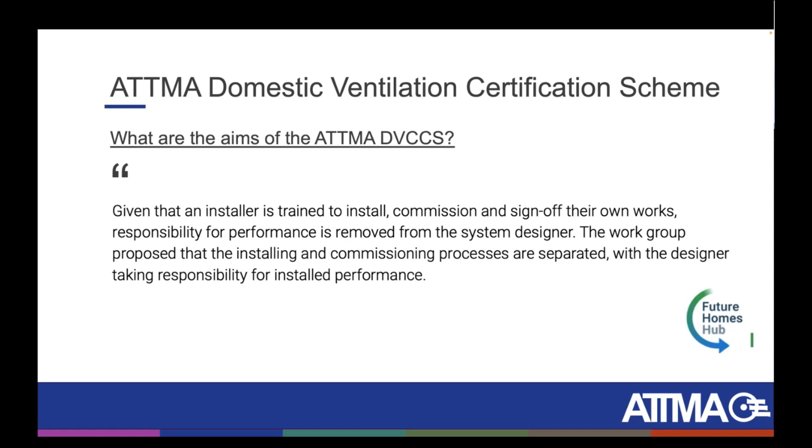The next line I took is, given that an installer is trained to install, commission and sign off their own works, responsibility for that performance is removed from the system designer. The work group proposed that installing and commissioning processes are separated, with the designer taking responsibility for the installed performance. Again, strong words, and we agree. It's time to make an improvement.

The last slide, figure 96 of that report, I thought was very powerful and definitely one to share with you - they split the process into 4 separate sections. Our chair said to me this morning, well, you could actually have a 5th. I thought, currently we have 1, so let's not run before we can walk. We have section A, which is design. We have B, which is install, and C, which is commission. Commissioning is actually where we sit right now.

This certification scheme that we're launching is about the commissioning. We're not the installers, we're not training for installation. We are simply looking only at the commissioning side of it, making sure that what works does work. I know there will be questions about overheating and approved document O, and it is our plan to work our way back - we're going to start at commissioning, then do installation, and we'll do design and overheating assessments as part of that. Overheating and approved document O does come into the commissioning process, but not quite in the way it really focuses heavily on design and making sure your window's open and you have the correct purge ventilation. So we're not going to focus on that just yet.

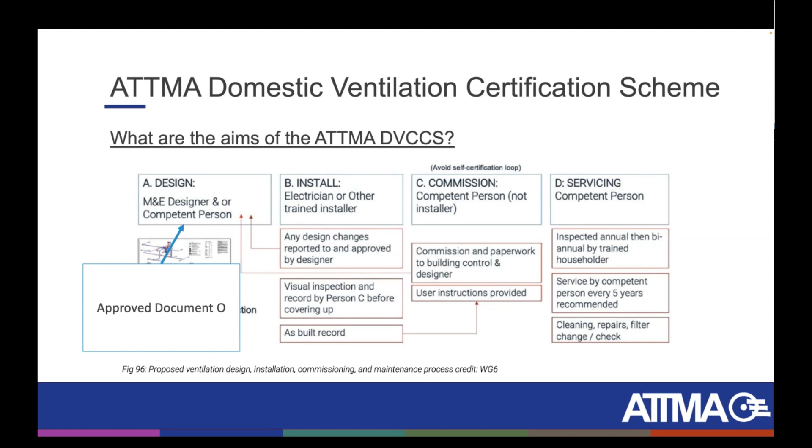Given that we do have a sound insulation testing scheme and we also have a ventilation scheme, at some point it would be prudent to combine the two and measure noise from ventilation. So do watch this space - this has the ability to really open ourselves up.

So the aims of the ATTMA DVCCS - again, catchier names can go into the comments - is to provide scheme members and testers with an independent and impartial way of demonstrating professional competence, as well as meeting the government's regulatory compliance requirements.

Testing, we know, has been mandatory in England since 2010 I believe - 13 years we've had of ventilation being measured. We all know, if you speak to anybody that does it, the fail rate is incredibly high, but the reaction, change and retrofit rate is incredibly low. These certificates get swallowed up and disappear, and we're going to make sure that no longer happens.

It's about giving valuable recognition under the scheme's brand to use for their benefit in the market, plus technical and non-technical support from our impartial staff employed by the scheme to manage what we do. It's really important - one of the successes of ATTMA has been our independence. We are truly the independent side of the business, and we really look after our members. None of us go out and do testing, none of us go out and do measurement, none of us go out and compete with anybody. We exist to make sure the industry operates to its full potential.

The ongoing promotion and marketing of the testing, specifically with its members, specifiers, stakeholders and regulators. We're probably on a lot more committees in some very important places than we always talk about, and that's something we definitely need to improve on. But we're always working behind the scenes with local governments, always reviewing reports and documents that come in to make sure air tightness, acoustics, and now ventilation is always top of the agenda.

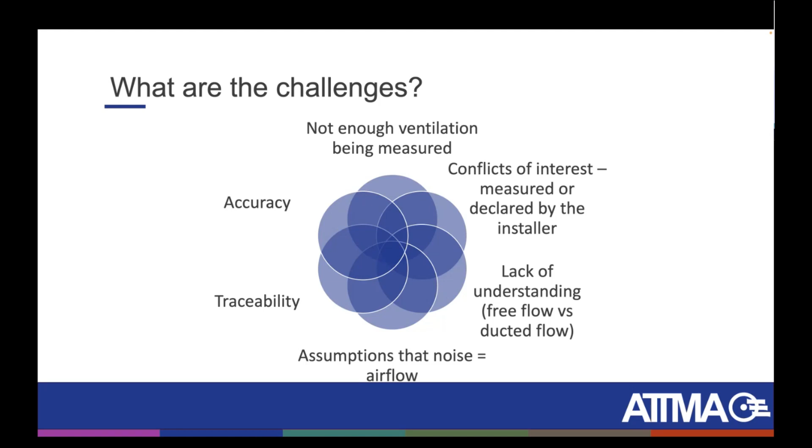We have a traceability and an accuracy issue. So not enough ventilation being measured - we know change cannot happen without a fit for purpose certification scheme being in place. And that's what I am hanging my hat on, that this is a fit for purpose certification scheme to make sure that we are properly measuring ventilation that's being installed.

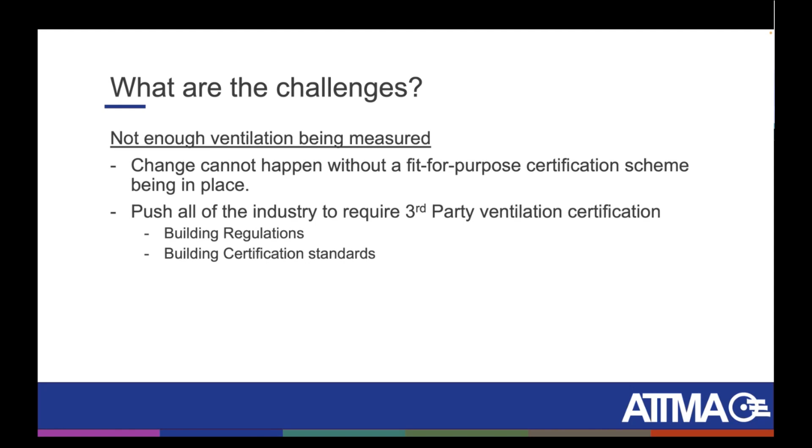We're going to push all of the industry to require third-party ventilation certifications. By proving the system we have and showing how it can be done, we're expecting to be dropped into building regulations and certain building certification standards as the route to go to ensure that your third-party ventilation checks are being done and are being done appropriately.

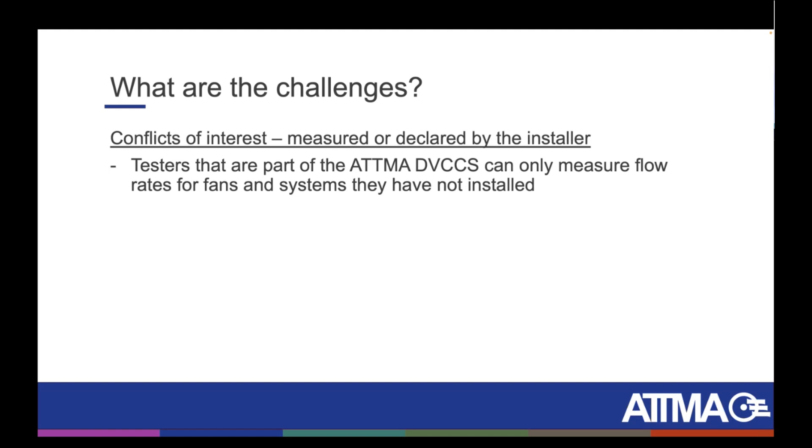In terms of measuring or declaring by the installer, that can't happen. You have to be independent of the installation. You cannot install and measure and sign it off as part of the ATTMA DVCCS. Again, answers on a postcard for a snappier name.

The lack of understanding - well, all members are trained and we assess everybody biennially. Every 2 years you've got to come back to one of the approved training partners. You'll be updated on any changes to the regulations, equipment, and technique, and you'll be expected to be assessed again. It's not something you need to worry too much about, it's just showing people you know how to do your job, but we are now implementing that mechanism so that we are reassessing ourselves as an industry.

We can't just sign people off and away, and 25 years later they're still qualified. So we've got to have some sort of technique to continuously retrain people to make sure they're keeping themselves up to date. As I said, we'll be teaching best practices alongside the assessments.

We've got to start changing the mindset of people in the ventilation industry or people in the construction industry. People in the ventilation industry generally get it, but we need to remove assumptions that adequate ventilation is provided without measurement. We can no longer say, I've installed a fan and it's okay. Why is it okay? I've held a bit of toilet tissue up to the fan and it's definitely sucking some air. That's not acceptable. We need to do better as a construction industry.

So we need to take actual measurements, provide actual data.

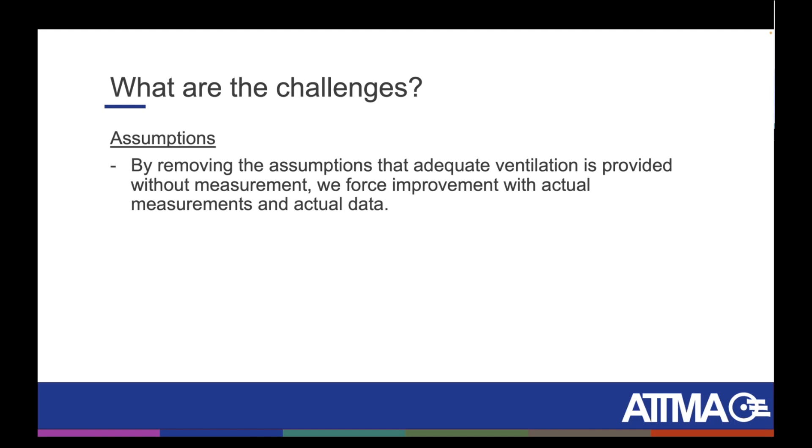In terms of traceability, we already operate our lodgement system. Our lodgement system is already worldwide - we're using it in 4 continents. If there was blower door testing in Antarctica, they'd be using the ATTMA lodgement system to record their air tightness tests. 1.3 million tests are now lodged in the ATTMA system.

And what we've done is adapt and add ventilation to our current lodgement system, so we can now combine the two. We can start looking at real data of homes and their ventilation, or home air tightness results and ventilation results, and start providing that analysis to local government so that we can improve what we're doing.

And we can also then cross-reference in years to come if homes do have problems, if there is mold growth, if there are issues with high CO2 levels. We can look back and say, how was that building designed? How was it measured? And what are the outcomes? Where did we get it right and where did we get it wrong? The only way we can do that is to collect this kind of data.

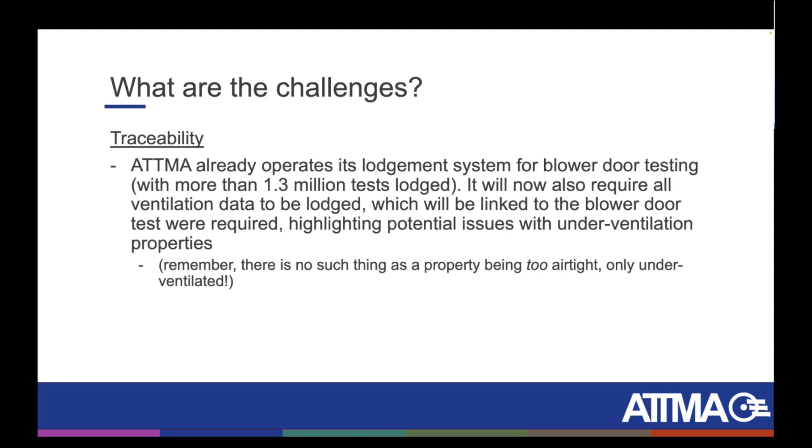And as I said earlier, remember there's no such thing as a property being too airtight, only underventilated. I could scream that till I'm blue in the face, and when I'm 6 feet under, that sentence is definitely going on my gravestone. I have screamed it until I'm blue in the face. There is no such thing as a home being too airtight, only underventilated. There's a little more to it, in accordance with its airtightness and design, but you can't get too many letters on a gravestone these days.

Accuracy is really important to us, so specific kit is required. Next to me in the room, we've got two different types of kit, and we actually restrict some of the measurement types we can do with certain kit because we need to accurately measure what we're doing. We can no longer just hold a vane anemometer up to an MVHR system and say that's about right. It's not good enough for the construction industry, and we need to play our part so everyone else can play their part.

So we've removed the minimum benchmark method. That cannot be used in the ATTMA DVCCS, but we are training people to use the pressure drop curves correctly. So it is important that we lead by example here.

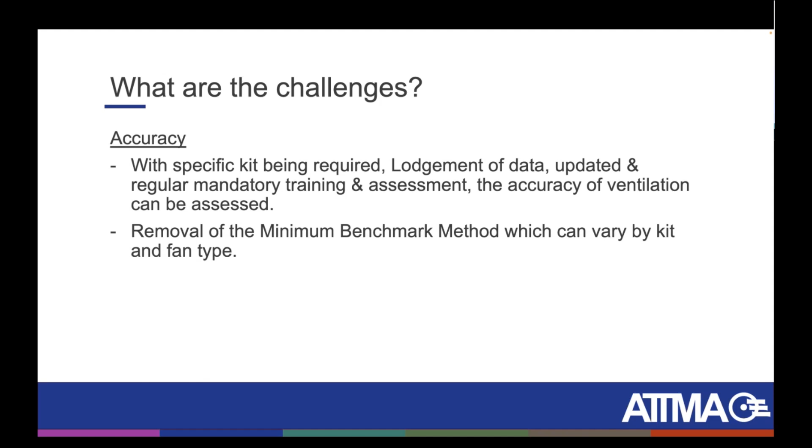So in terms of scheme highlights, I think this is where most of the questions are going to be around. You'll see that the green color we use here, you'll start to see more and more. That's our ventilation color that we're using as part of our marketing.

So we actually have two parts of the scheme. This isn't just about going out and commissioning MVHR systems, this is about all ventilation strategies in the UK. Part 1 is used to measure intermittent and decentralized fans. So if anybody is already out measuring fans and already owns a vane anemometer, you can go out and start commissioning ventilation systems within the ADVCCS.

Those can be done on intermittent and decentralized domestic ventilation only. So if you have a vane anemometer and not a powered flow hood, you're restricted to intermittent fans and decentralized domestic ventilation. There should be very little interruption as to what's already happening. If you want to balance centralized ventilation, you'll need to join part 2 of the scheme. Part 2 requires a powered flow hood in order to make those measurements. Otherwise the measurements just aren't accurate enough without appropriate power flow curves and quite complex calculations. So it's really important for us that we split those two up.

Part 1 is still 50% of the construction industry - actually a little higher, about 55%, are still installing intermittent fans, system 1, as we'd all know it. So it's wrong for us to ignore that part of the market, but we've got to include part 2, which is the commissioning of MEV systems, which, as I say, around 45% of the market is made up of centralized MEV and DMVHR systems.

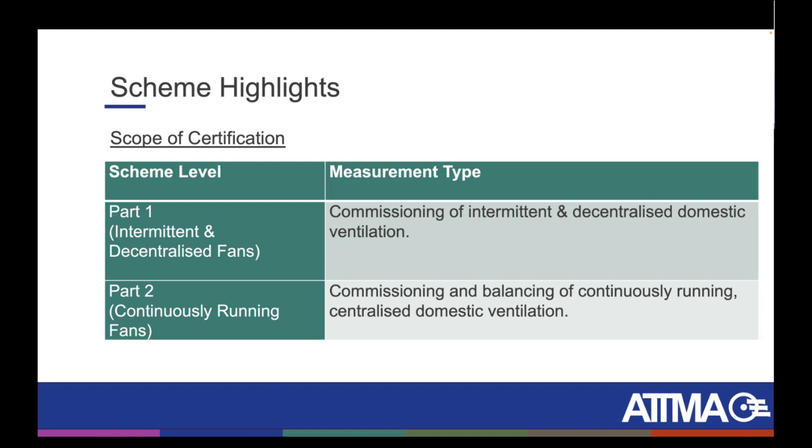So that's our two sections. We have two entry routes. Route 1 is training and assessment, so that's just like it would be for blower door testing, just like it would be for sound insulation testing. You can come to any of the approved training partners that run the ventilation training and sit your assessments. Or if you already hold some qualifications such as BPEC or NICEIC and wish to move over to our scheme, you can just come directly and do the assessment.

So for part 1, that's simply coming to measure some intermittent fans that we have installed here and making sure you can do the power drop curve - so you're calculating the back pressure. And if you want to join part 2 of the scheme, we'll ask you to commission an MVHR system that we have set up here with the appropriate flow rates.

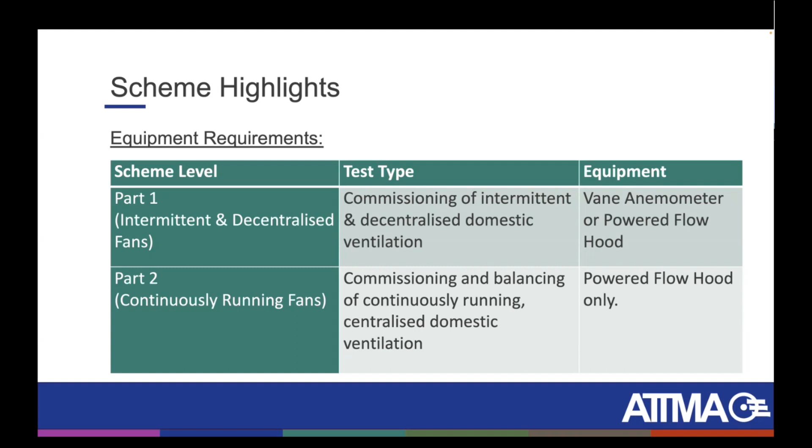We've discussed briefly the equipment requirements, but it is important that we make it clear: if you have a powered flow hood, you can join parts 1 and 2. If you have a vane anemometer only, you can join part 1, which, as I say, is more than 50% of the market currently. Calibration must be undertaken by a UKAS accredited calibration laboratory, and it must be calibrated annually. That's no surprise. And we have the ATTMA lodgement process.

So what I'm going to do is just show you where I truly believe the value comes in from this certification scheme. Special thanks to Simon for his hard work in making this happen, because the work that's gone in is unbelievable. Most of you guys will recognize the ATTMA lodgement system.

And you'll start to see some changes. We're now going to be adding all of the schemes into one big lodgement system. That should happen by the end of the year, and that's called Building Passport. So your air, your sound, your vent tests are all going to be included into projects. You'll create a project each time you test, and it will show you all of your different test results under one project.

So what I'm just going to do is lodge a ventilation test quickly. So under ventilation, lodge test. If you've already done your air tightness test, you've already created yourself a project, so you can simply type the project ID.

I'm using 103 because that's the test one, and it will show you all of the plots that have been used. What I'm going to do is just create a new plot, and I'll call this ADVCCS example. It's going to be system 4. We're going to make it 3 bedrooms, floor area of 140. And that's the minimum information I believe we need for this side of it.

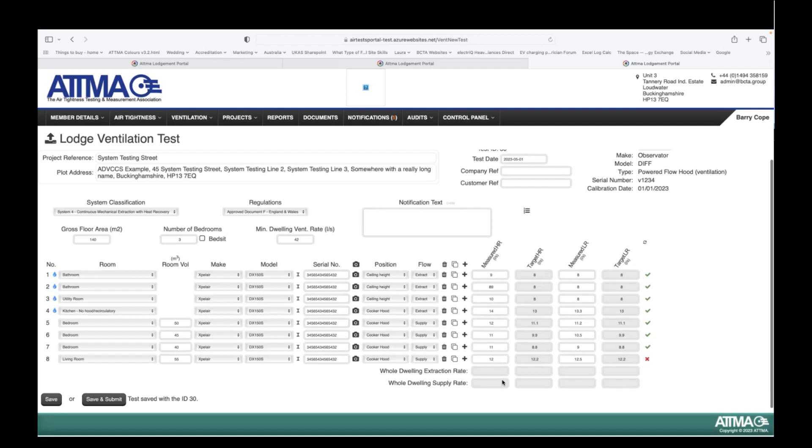So then you can save and submit, and it will calculate the flow rates, and then you can download your test certificate, just like you would your normal ATTMA lodgement certificate, and that's you able to submit the test.

Let's pull open the certificate. There we go. So here's the certificate. You can see what that looks like. You'll see the lovely green color and all of the information on it.

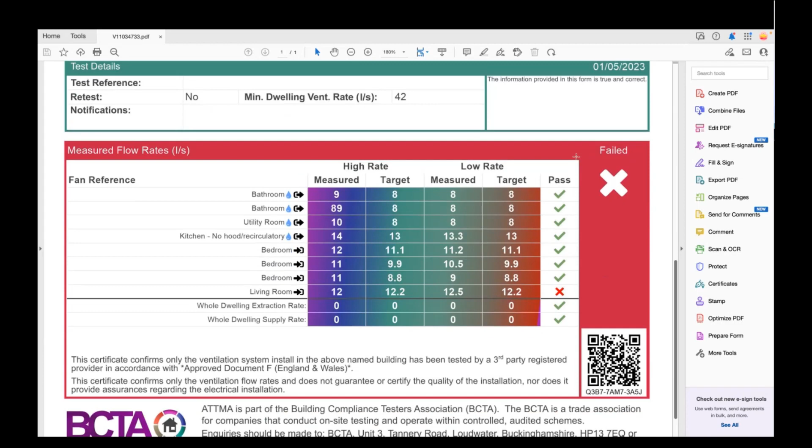For those of you eagle-eyed, you may have already noticed the DV, domestic ventilation tick in the certificates that appeared some time ago. And what it will show in this case, it's actually failed because the high rate didn't meet the requirements that it's meant to. And the same quality control applies.

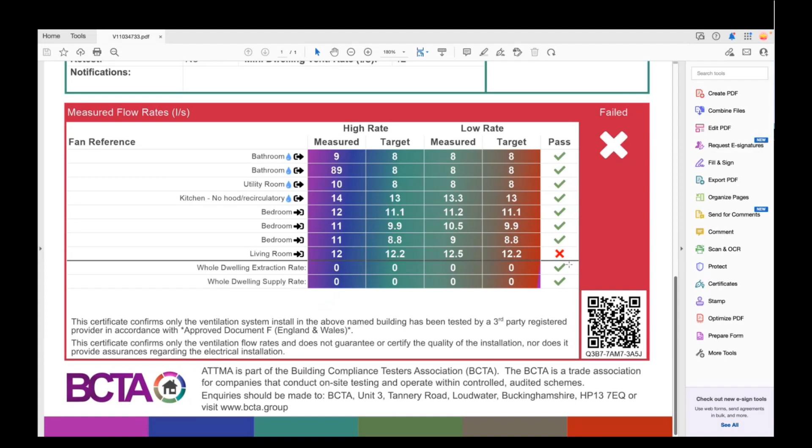So you'll have your QR code as required to ensure you can check any certificate just by scanning it with your phone, or if you're on a computer, you can tap, or you can actually copy the code at the bottom and head to the ATTMA website and check that the data is correct.

Okay, let me get my presentation back. So the question we all want to know, how much is this going to cost me? Well, I think it's actually quite reasonable.

For the assessments, if you're just doing the part 1 assessment, it's £100 plus VAT. For part 2, it's £150 plus VAT. And your scheme fees, £250 plus VAT per year. And that's based on a personal basis, so that's not a company basis. That is each individual registered measurer.

And lodgement will be exactly the same and will follow the air tightness lodgement rate at £1.75 plus VAT. The annual fees will apply from July to June each year, so they're separated out from the air tightness fees, so you don't get a big whack all in January with all of the certification. They'll drop in slightly later in the year, but operate on the same pro rata basis.

So in summary, the ATTMA DVCCS is a third-party independent check of correct ventilation airflow. A certification scheme that will proactively ensure all ventilation systems are measured, not assumed or fraudulently signed off - and I don't use that word lightly. A lodgement system that reduces admin, increases accuracy and traceability, and does calculations on the fly. It has multiple levels, so testers measuring system 1, as I still call it, are still recognised, and a network of approved training partners to deliver training and assessments is currently being built up and down the country. This is not just an us thing - it's nationwide, so we can get people trained, dropped into the certification scheme, and build a new army of ventilation measurers so we can start to make a good difference in the industry.